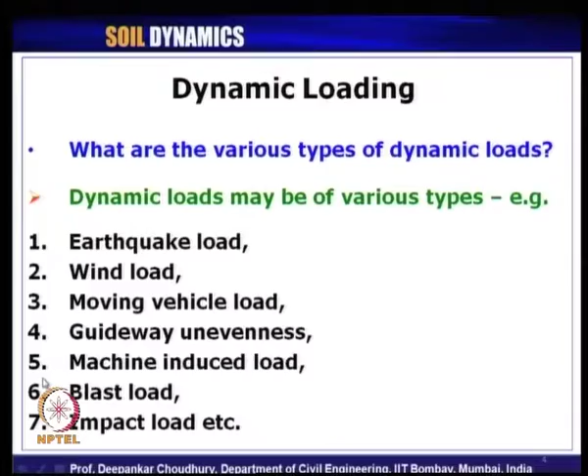In the first lecture, we covered module 1, which contains the introduction of the course. We have seen the need for studying this course and also its objective. Then we have seen what is called dynamic loading: any load which is varying with respect to time, and the dynamic load must vary with time. We have seen examples of various types of dynamic loads like earthquake load, wind load, moving vehicle load, guideway unevenness, machine induced load, blast load, impact load, etc.

But that does not mean that all time dependent loads are dynamic. There can be live load also which are not dynamic in nature. So, to comply with the loads which are dynamic in nature and also varying with respect to time, the criterion is it has to vibrate the system, and vibration is the process of continuous exchange of potential energy to kinetic energy and vice versa.

And we have seen the example of the simple pendulum where the exchange of potential energy to kinetic energy occurs, and another component of energy is also involved in the process: the dissipation due to the loss of energy in the form of sound or heat, etc. So, with that we completed our previous lecture on module 1, the introduction of the topic on soil dynamics.

Let us continue our discussion with today's lecture, lecture 2 of soil dynamics, which contains module 2 on vibration theory. To go into the details of module 2, let us define some of the parameters which will be very much required for us to understand the concept of vibration in this module. The first important parameter which we want to define now is called degrees of freedom, generally denoted by the abbreviation DOF.

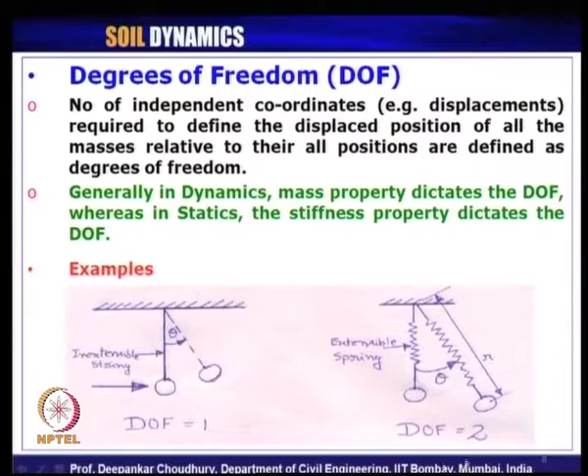Now, if we change the same problem to this problem, that is two simple pendulums connected by an extensible spring or a linear spring, what will happen? Suppose these rods are still inextensible. In that case, how many coordinates do we minimum require to define the position of the system? Suppose we apply a dynamic load to the system here, we need this angle to define the position of this pendulum bob at any point of time. Also, we need to know this theta, because this theta 1 and this theta 2 will not necessarily be the same, because in between there is an extensible spring, because of which the spring will either expand or compress. So, that means theta 1 and theta 2 will be different, or these are the two independent coordinates we require to define the system at any point of time, and that is why the degrees of freedom for this problem is 2.

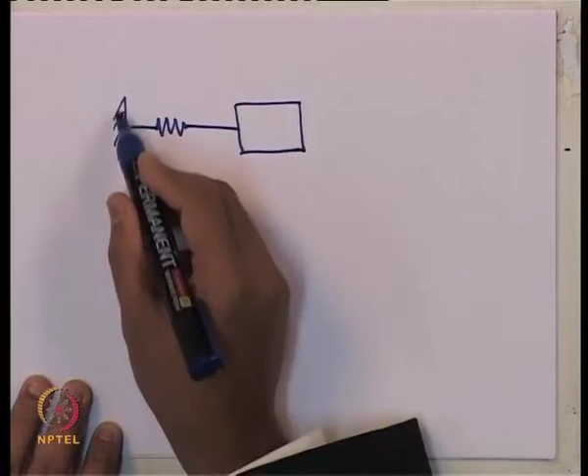Let us look at a few more examples of how to obtain the degrees of freedom of different systems. If we take a system like this, it is a rigid support, then one spring connected to a mass like this. If any dynamic load is applied to the system, how many independent coordinates are required to define its position at any point of time? That is this u of t, because of application of say p of t. So, in this case the degrees of freedom will be 1, because only one parameter or coordinate is required to know its position at any point of time.

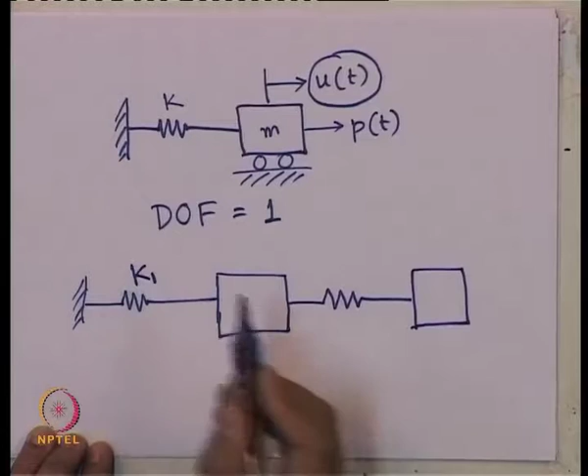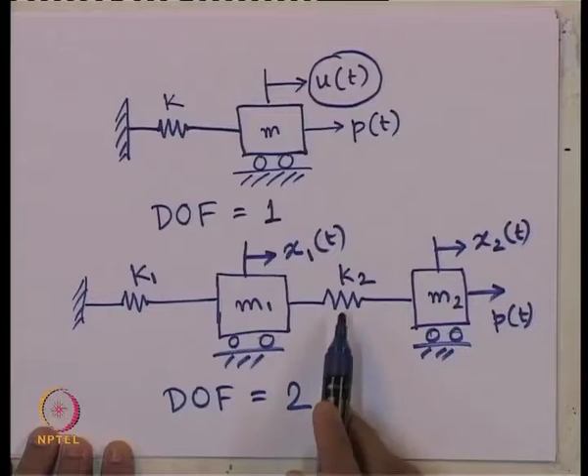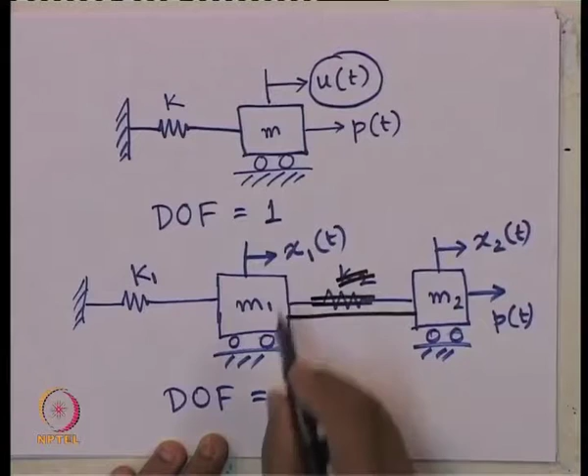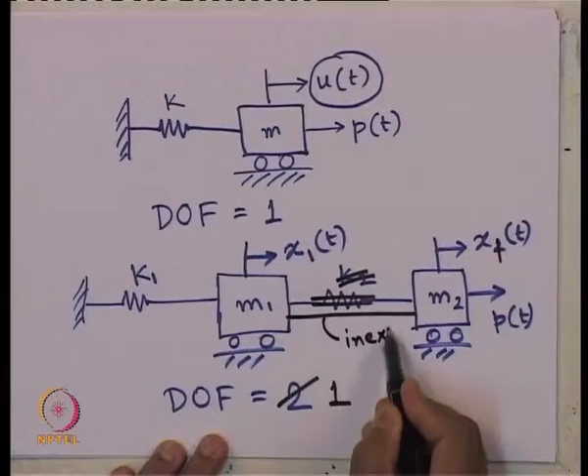Now, if we take another example, suppose we have one spring, then a mass, then another spring, then another mass. Say this is K1, this is M1, this is another spring K2, this is mass M2, and to this system we apply some dynamic load. How many degrees of freedom does this problem have? That is DOF is 2. Where did we get this value 2 from? Because at any point of time this displacement say x1 of t and this displacement say x2 of t, these two are independent parameters or independent coordinates which we require to define, because they are connected through this spring. So, x1 and x2 will not be the same. But suppose we connect them through an inextensible string instead of K2, then the DOF will become 1, because in that case essentially x1 and x2 will become the same if this rod is inextensible. Then the problem boils down to degrees of freedom 1.

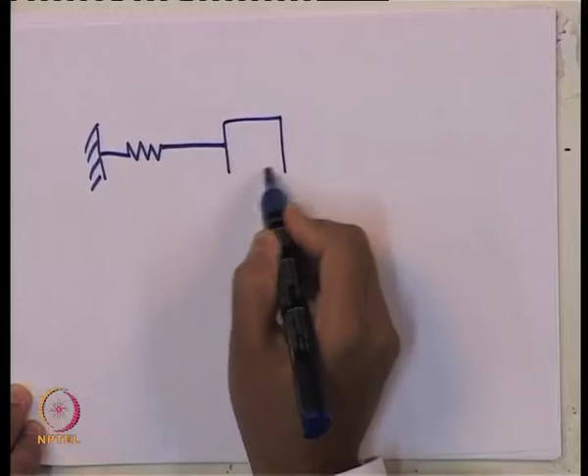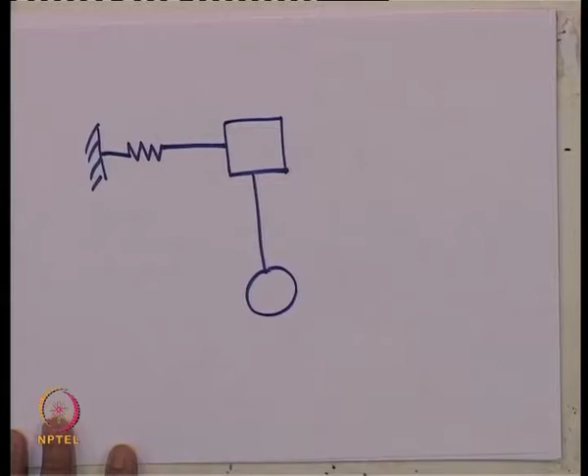Let us take another example. If we have a system with a combination of this linear spring connected to a mass, then connected to a bob or pendulum kind of arrangement, how many degrees of freedom does this problem have? This is mass say M1, this is mass say M2, this is spring K, and this rod let us say inextensible.

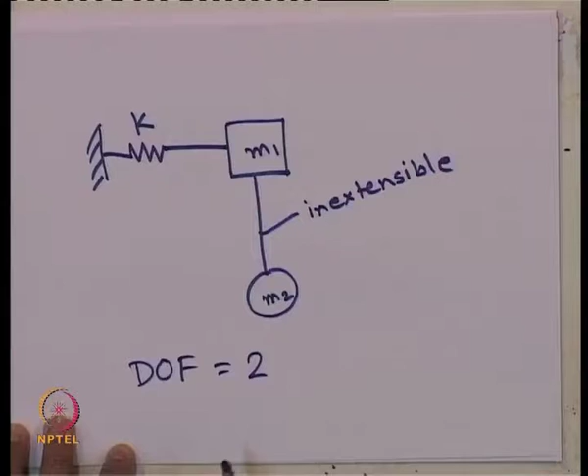In this case, the degrees of freedom for the problem is 2. Why? Because if we apply a dynamic load to the system, the minimum number of coordinates we require to define its position at any point of time is this x1(t) and this theta(t). So, these two are the 2 degrees of freedom for the problem under any dynamic loading.

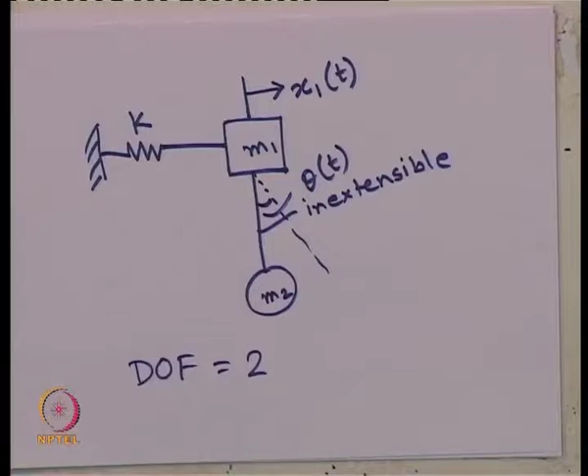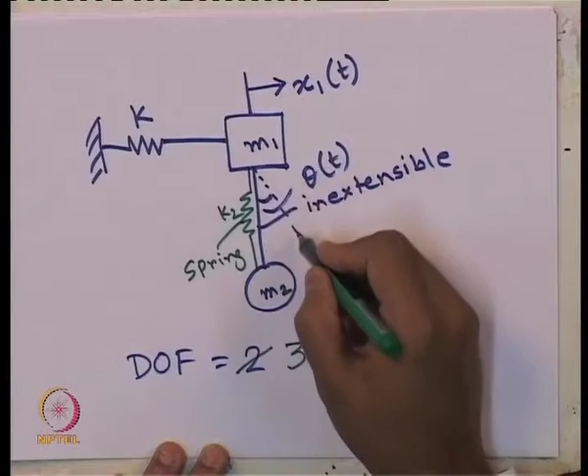Now, the same problem, if we change it a little bit, suppose instead of this inextensible string, it is connected by a spring, another spring say K2, how many degrees of freedom are we dealing with in that case? It will become 3. One degree of freedom is this one, another is this theta, and the other one will be this length, say r(t). So, these 3 will be the degrees of freedom for the new problem we have shown in the green color.

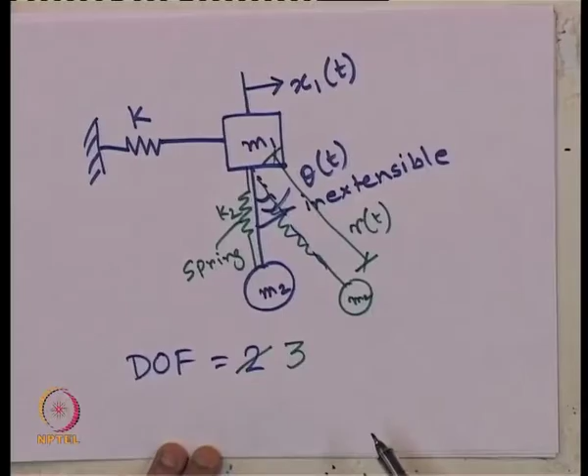So, that way we have to find out how many independent coordinates are involved in any system when we are handling dynamic loading acting on the system, to define its position at any point of time. That defines the degrees of freedom, and it is extremely important to find the correct degrees of freedom for any problem before we start modeling any system in practice, because from then onwards the solution technique and all other things will depend on it. That is why obtaining the correct degrees of freedom is very important for any dynamic problem.

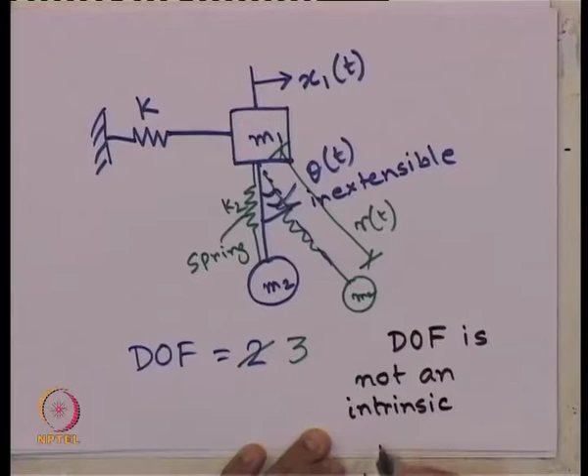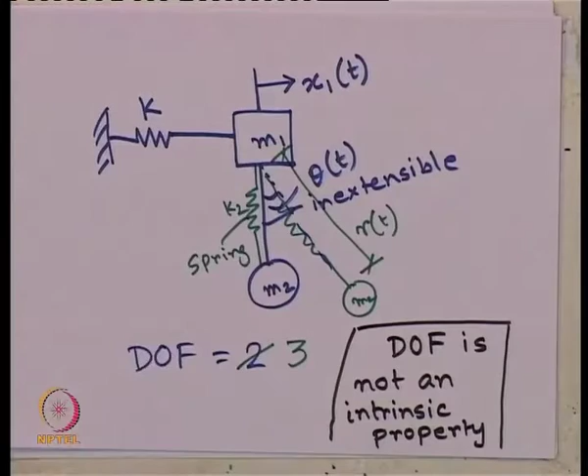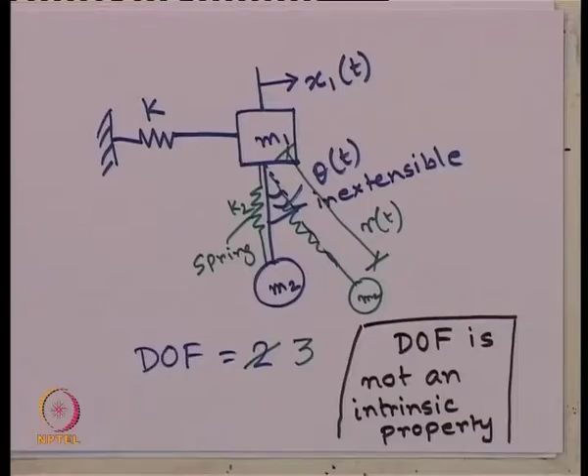But from all these examples, what we can mention, let me write it down. DOF, degrees of freedom, is not an intrinsic property of the system. Why? Because we have seen that for the same system, depending on the conditions of different connections or boundaries, the degrees of freedom of the problem keep changing. So, degrees of freedom is not at all an intrinsic property of the system, but it depends on the boundary conditions and other loading conditions, etc.

Now, let us look at what we studied in the previous lecture. Let us move back. The basic components of vibration. In the previous lecture, we saw there are three basic components of vibration. One is potential energy, in which displacement and stiffness are related to each other. Then kinetic energy, in which acceleration and inertia are related to each other, and then dissipation or loss of energy, where damping is involved.

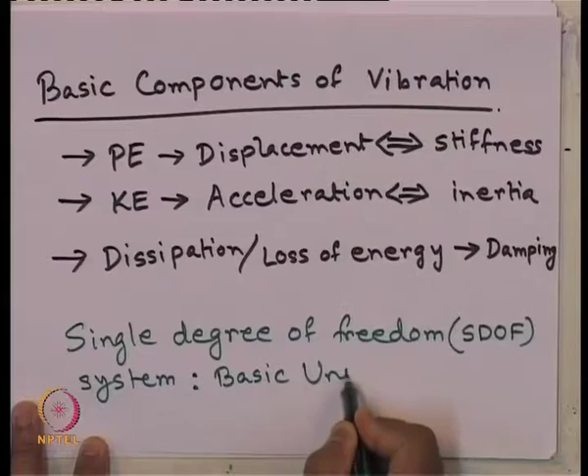So, if we take any simple vibrating system, what is the basic unit for a simple vibrating system? A single degree of freedom system, in short generally written as SDOF. Under the condition of a simple vibrating system, what are the basic units? We have three basic units which allow us to consider all the basic components of vibration, that is potential energy, kinetic energy and dissipation or loss of energy.

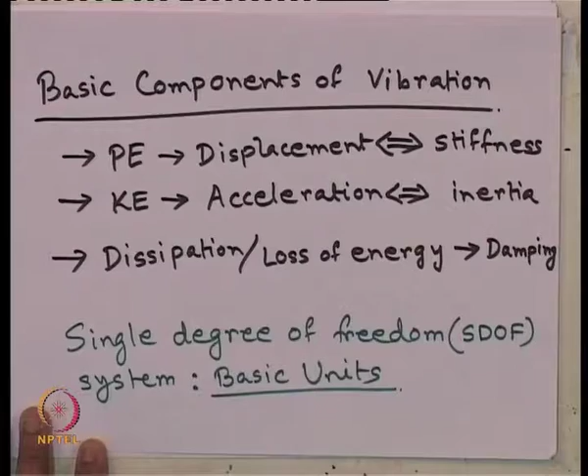Potential energy can be represented by a spring. The kinetic energy can be represented by a mass, and the dissipation or loss of energy can be represented by a damper. So, the basic units of a single degree of freedom system are mass, spring and damper, which in short is called the MSD model. It is clear why in a simple vibrating system we need these three essential components, because these three define all the basic components of vibration. The dissipation is optional, it may or may not be present, but potential energy and kinetic energy are essential in this simple vibrating system.

So, if we now look at the slide, it says for a simple vibrating system with a single degree of freedom, the mass spring damper system is the basic unit. Let us take a single degree of freedom system with a mass m, a spring with spring constant k and a damper with damping coefficient c, which represent these three basic units of any simple vibration. The single degree of freedom, let us say, is defined as u. So, u(t), we should know to know the position or coordinate of the system at any time under this externally applied dynamic load on the system, let us say P(t). Let us assume this is a frictionless surface and these are rollers.

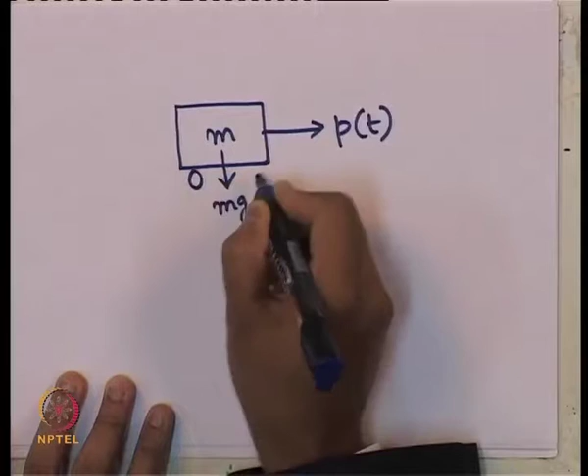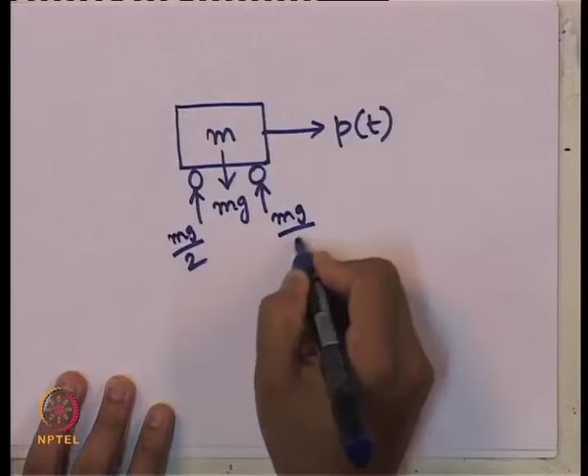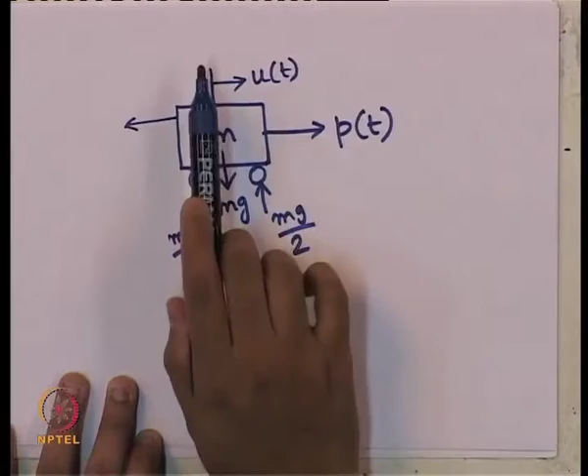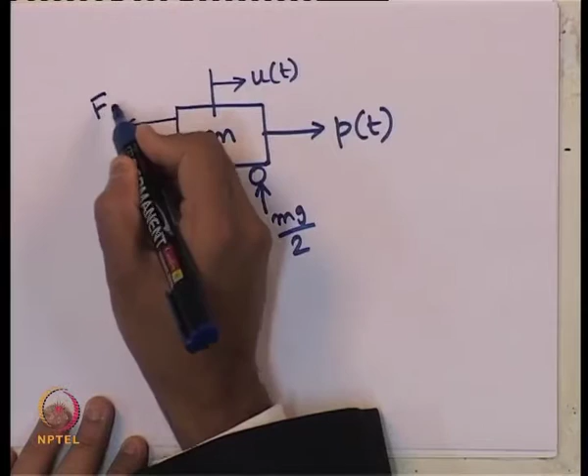Now, what we were discussing just now, let me redraw it here further, the free body diagram. This is the mass on which the externally applied dynamic load P of t was acting, and we have the weight acting vertically downwards, which is getting balanced by the static reactions from these rollers. So, this will be mg by 2, this will be mg by 2, and as at any instant of time it is prompted to move, we have taken its direction of motion in this way. So, obviously, the forces of resistance will try to pull it back to its original position. That is why the damper force, spring force and the inertia force, these three forces of resistance, are getting developed in the system.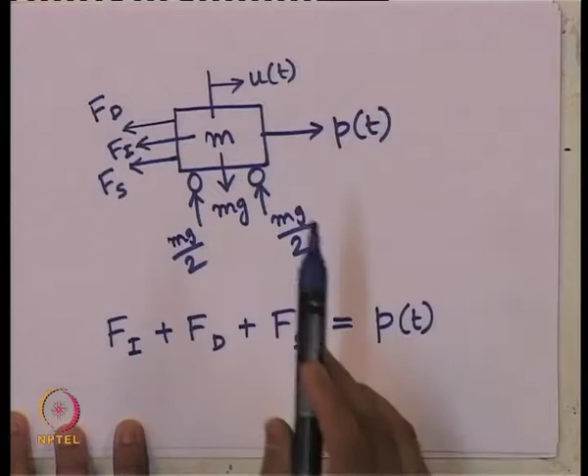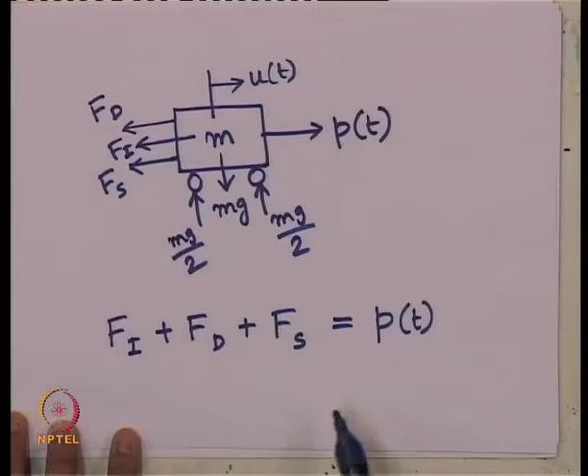using D'Alembert's principle, because it says the externally applied dynamic load for any body which is in motion should balance the inertia force and other forces of resistance, that is damper force, spring force, etc. So, in this case we have these three forces of resistance that must balance the externally applied force to maintain the equilibrium of the system. So, that is the condition we are getting from D'Alembert's principle.

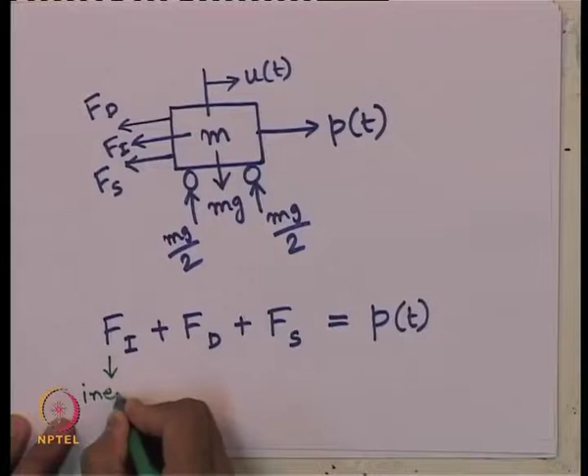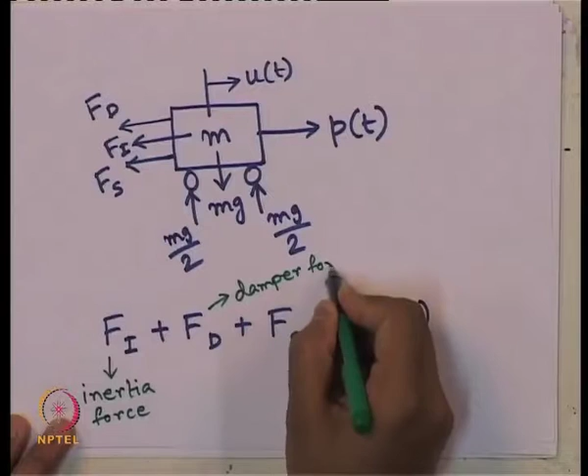Now, let us look at the behavior of each of these three forces. So, what are these three forces? Let us write it once again. This F I is called the inertia force, F D is called the damper force, and F S is called the spring force, and P of t is the externally applied dynamic load.

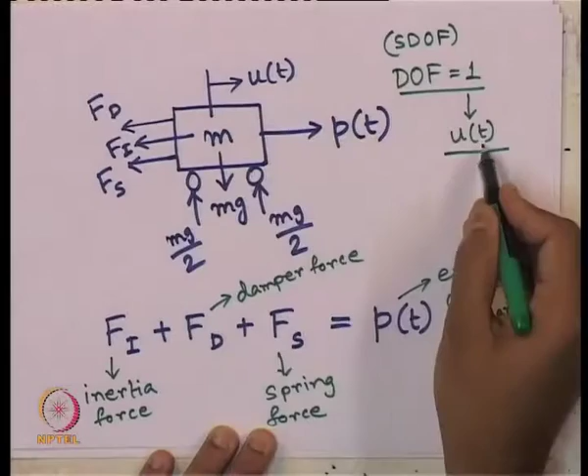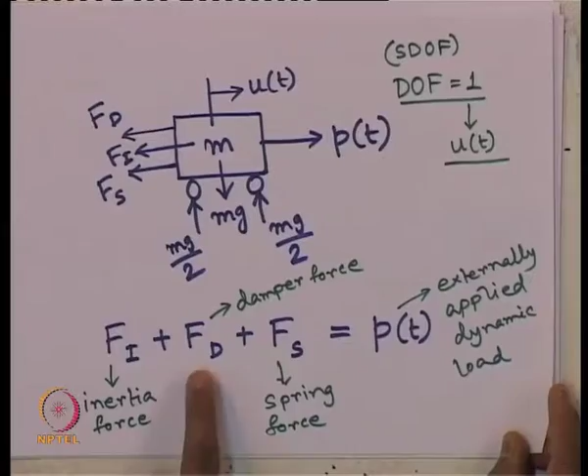In this case it is a problem of degrees of freedom 1. So, that is why we have already defined the single degree of freedom system, and that degree of freedom is nothing but u of t, that is, we should know the displacement at any point of time, which is the minimum coordinate required to define its position at any time. Now, let us look at the nature of each of these forces. So, first let us take the nature of the inertia force.

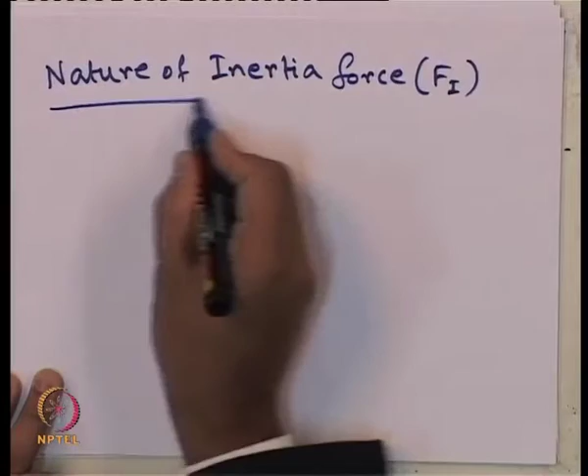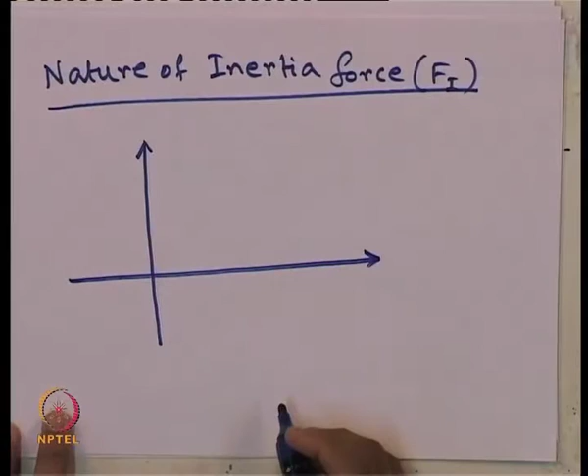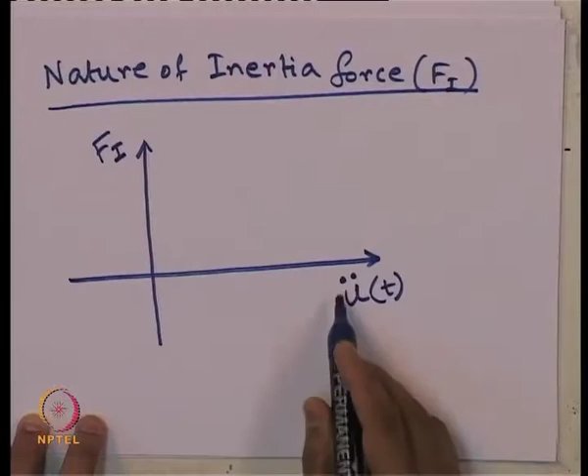F of I. So, how does the inertia force vary with respect to acceleration? Already in the previous lecture we mentioned that inertia is related to the acceleration component. So, F of I, how does it vary with respect to u double dot of t? As I have already mentioned, u double dot is nothing but d 2 u by d t square, the second differential of the displacement with respect to time.

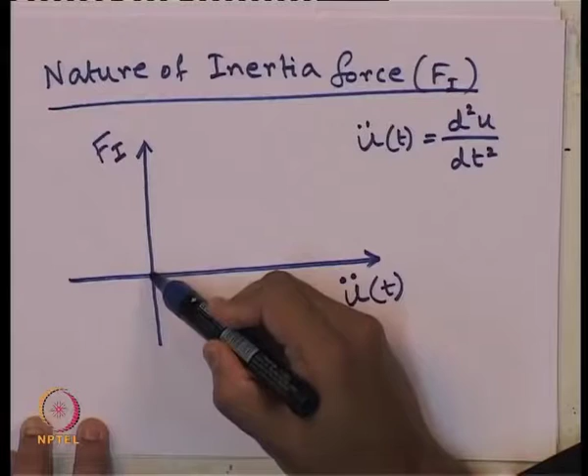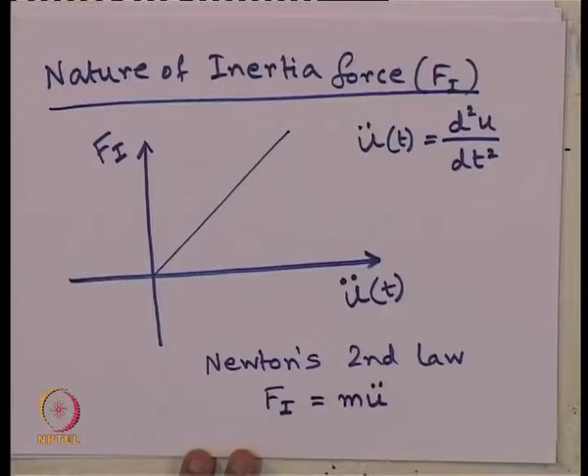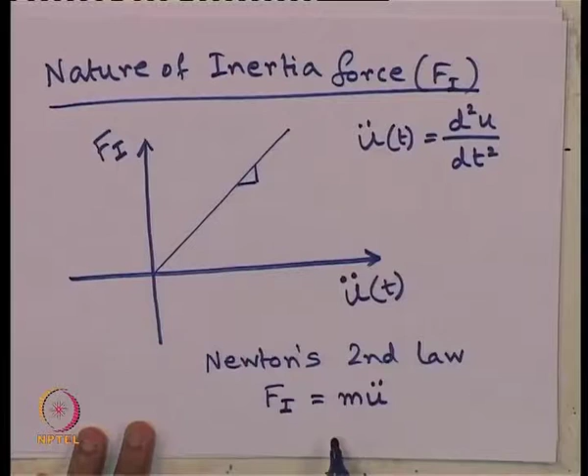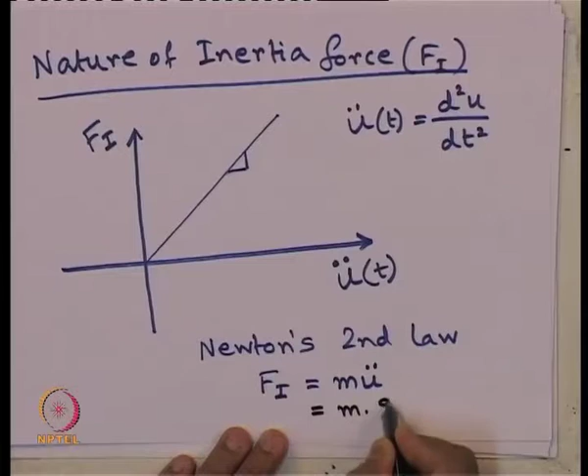Now, we can assume a variation like this, which comes from Newton's second law of motion. What it says is that F of I is equal to m u double dot, that is, inertia force is nothing but mass times the acceleration. In this case the slope of this graph is nothing but the mass. If we rewrite it in a different way, it is coming from m d of dt, then d of u by d of t. So, if mass remains constant, then only this is constant and this behavior is linear. So, this equation is correct for

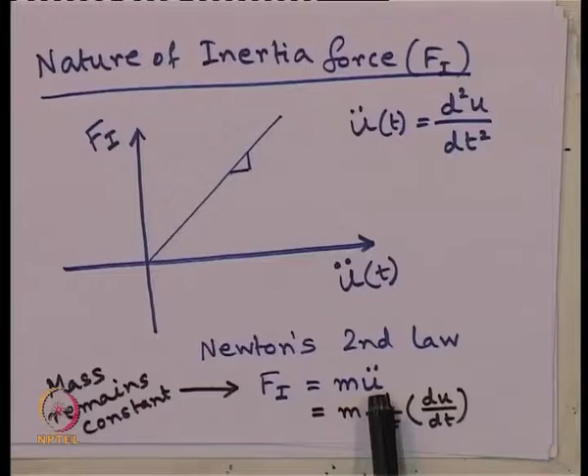mass remaining constant; if m remains constant, then only we can use this relation. Suppose in any dynamic system the mass does not remain constant, in that case it is not this relation of F I with respect to the acceleration, but something different. It can be some curvilinear, some nonlinear variation of F of I with respect to u double dot. In that case it need not be the simple relation.

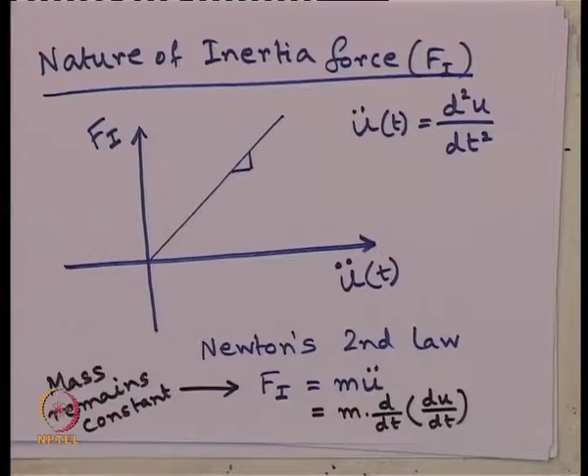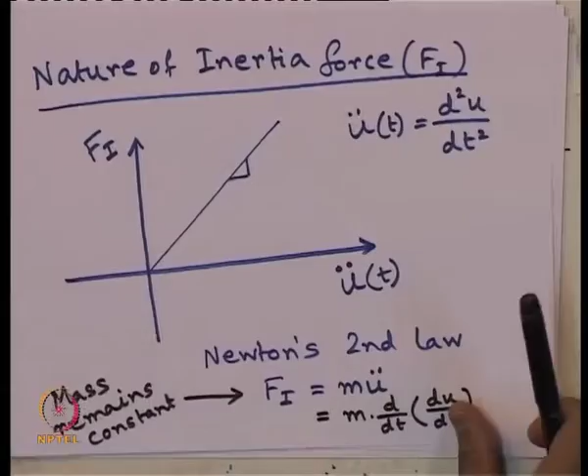For example, when we take some aerodynamic problem, where with respect to time there is loss of mass. So, mass does not remain constant in many aerodynamic problems. In those cases, we cannot use this relation of F I equals m u double dot. It is valid only for a system where there is no change in the mass. So, mass remains constant, then only this equation holds good. So, this is the linear model we have considered for inertia force.

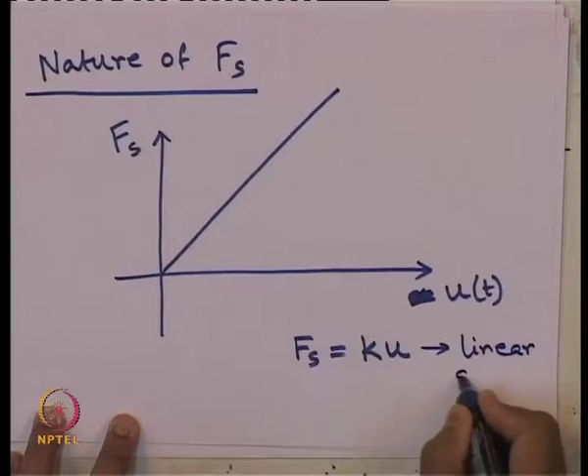the stiffness force. This is valid only for a linear spring, that is, where the force displacement relation is linear like this, then only the slope of this graph is nothing but the spring constant. We know this, but there are several examples where it need not be like this. It can behave something like this, it may behave something like this. These are called, this is like a strain softening effect, mostly considered for cable. This is the hardening effect, mostly considered for beams, rigid beam. So, there the force displacement relation need not necessarily be linear, but it can be curvilinear in nature. In that case, this relation of F s equals k times u does not hold good. So, we have to be careful when we are using these expressions for forces. The spring force equals k of u is valid only for the linear spring.

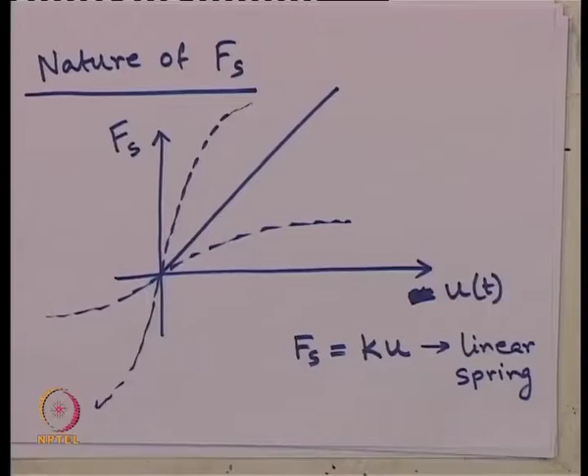Now, coming to the nature of the damper force, F of d. The damper force is related to the velocity component u dot of t, where u dot t is nothing but du of dt. So, how does it vary? It can vary like this, that is linear starting from this 0 point. In that case, we write F of d equals c times u dot t, which is valid for a linear damper once again. If this linear relationship of the damper force with respect to the velocity holds, then the slope of this line is nothing but the damping constant or damping coefficient.

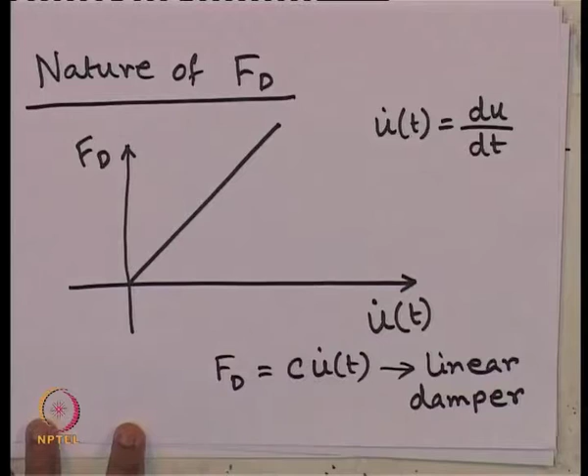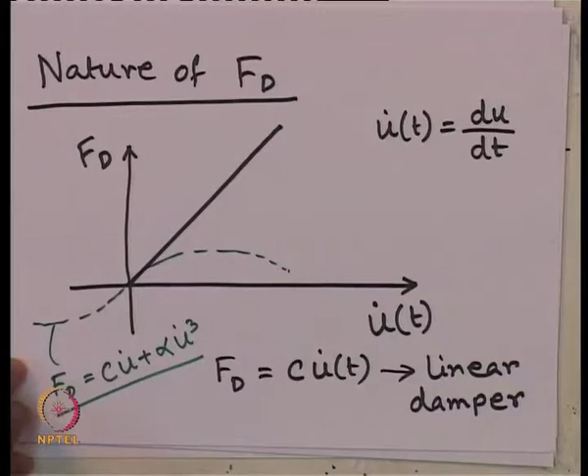But there may be several other variations of F of d with respect to u dot, say some nonlinear variation something like this, which is pretty common in some designs, for example, a chimney subjected to wind load. In that case, F of d can have some nonlinear relationship, say c u dot plus alpha times u dot cube, something like this. Then we cannot use this linear damper equation so easily for our model. So, we have to be careful what type of variation of each of these forces, F s, F d and F i, is considered for a particular model or a particular system when we are analyzing a dynamic problem.

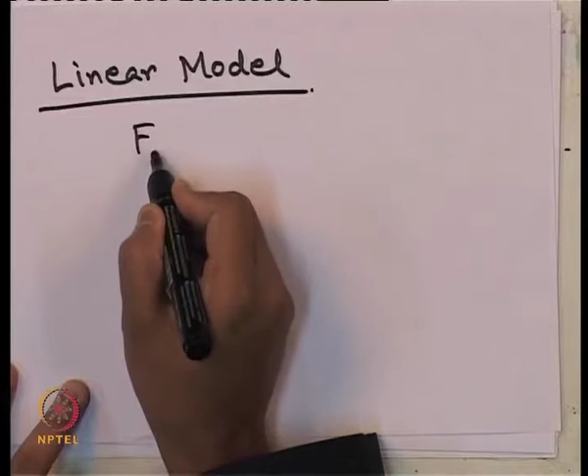So, for the simplest case, what we can mention, by considering the linear model, we got the equation f_I + f_D + f_S = p(t). That was the equation from D'Alembert's principle. Now, if we use the linear model, f_I is nothing but m times d²u/dt², that is the inertia force. What is the damper force? c times du/dt. What is the spring force? k times u, that equals p(t).

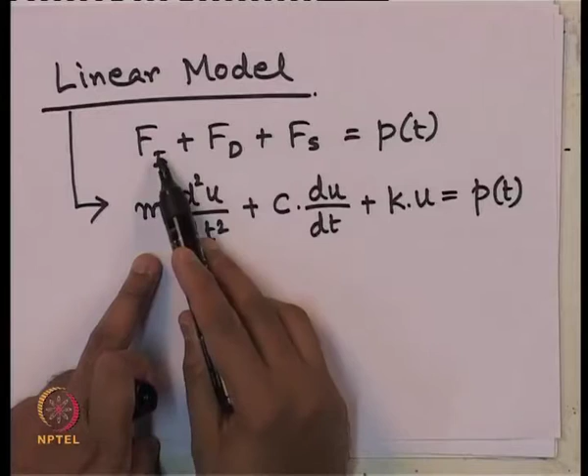So, this equation we have written based on the nature of all these inertia force, damper force and spring force, by considering them to follow the linear model, that is a linear system where mass is not changing, then this equation is valid. The linear damper, then this relation is valid. A linear spring, then this equation is valid, which in other form we write as the governing equation of motion m u double dot plus c u dot plus k u equals p(t).

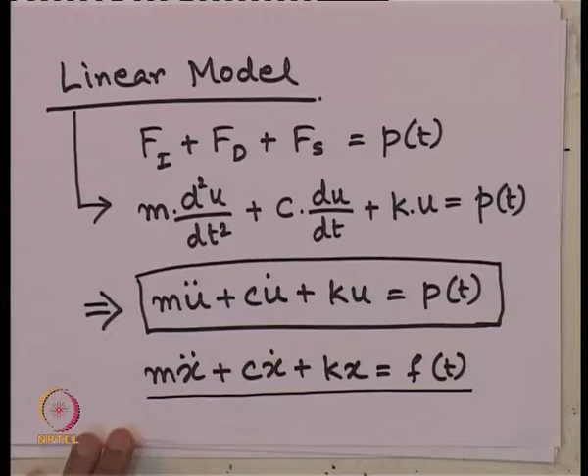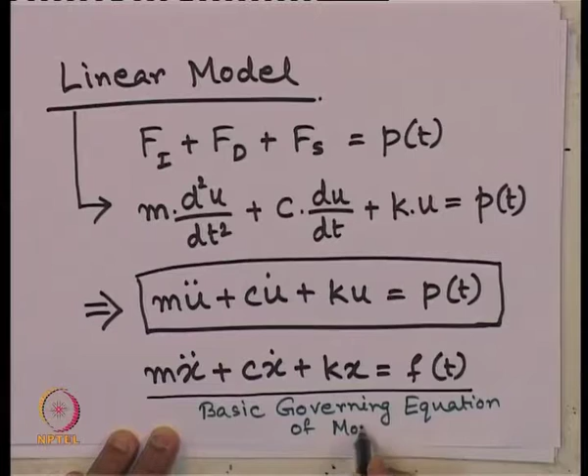The same thing in some books can be written as m x double dot plus c x dot plus k x equals f(t). The same thing is written using different notations. That is, instead of u for the displacement, x is considered as displacement. In that case, the same relationship can be written in this format. So, this is called the basic governing equation of motion. So, the basic governing equation of motion for a single degree of freedom mass spring dashpot model vibrating system is expressed as m u double dot plus c u dot plus k u equals p(t).

If we take the unit for mass, stiffness and damper in different systems, that is the MLT system, that is mass length time system, the FLT system, force length time system, and the SI unit, then the unit of mass in the MLT system is of course the mass M itself. For stiffness, the unit is mass by time square, that is M T^-2. For the damper, the unit is mass by time, that is M T^-1. In the FLT system, the unit for mass is force by acceleration, so F L^-1 T^2. For spring constant, the unit in the FLT system is force by length, and for the damper, the unit in the FLT system is force by velocity, so F L^-1 T.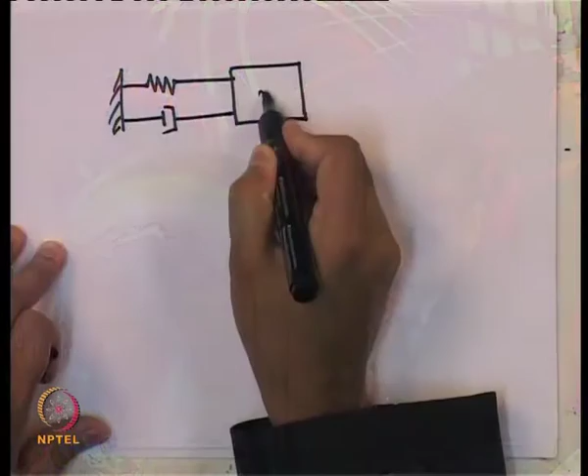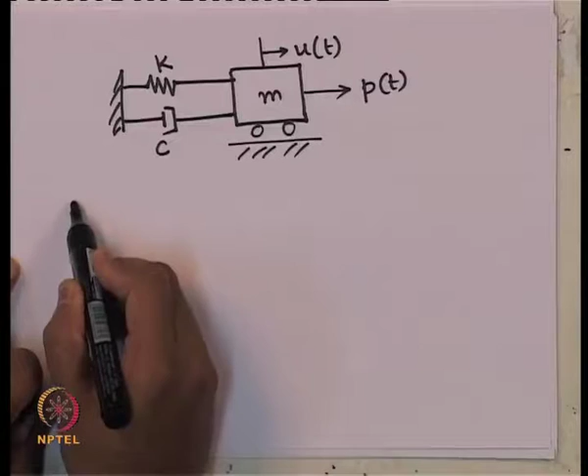Now, let us see what are the different types of vibration we can have by considering this linear model. For different types of vibration in a single degree of freedom system, let me draw that single degree of freedom system once again. Mass, spring, dashpot, we have an externally applied dynamic load, and this is our degree of freedom. So, for this single degree of freedom system, the major classification is, one is called free vibration. What is free vibration? If there is no externally applied load on the system. So, if this p(t) is not present, then the system is called free vibration. But if that externally applied dynamic load is present in the system, in that case we call it forced vibration. So, in that case p(t) is not equal to 0.

Now, within each of them we can have again two separate subcategories. Within free vibration we can have two categories. One is undamped. Undamped means when this damper is not present. So, there is no damping effect, c equals 0, and another is damped, that is c is present, not equal to 0. Similarly, for forced vibration also we can have the same two conditions, that is undamped and damped.

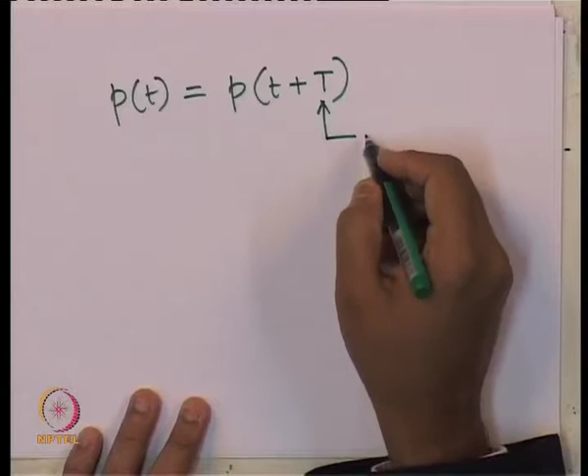What is periodic forced vibration? Periodic forced vibration is when we have a system where this P of t is such that it repeats its nature after a certain period. In the previous lecture, we discussed that this capital T is generally denoted as the natural period. So, if we mention it as the period, then this is the type of force on the system when the dynamic load is present. For example, it can be a sine load or cosine load, where the nature of P of t repeats after a certain period or certain time. In that case, it is called periodic

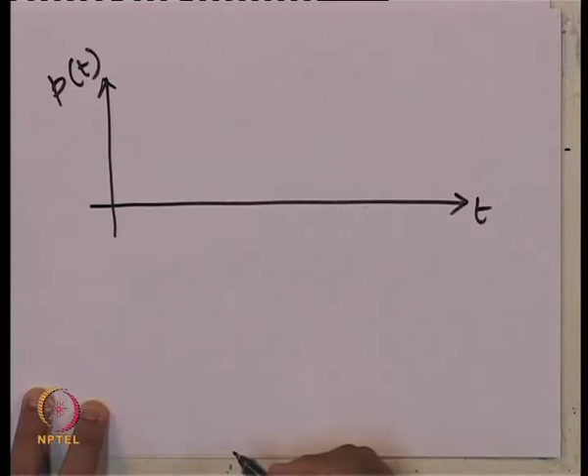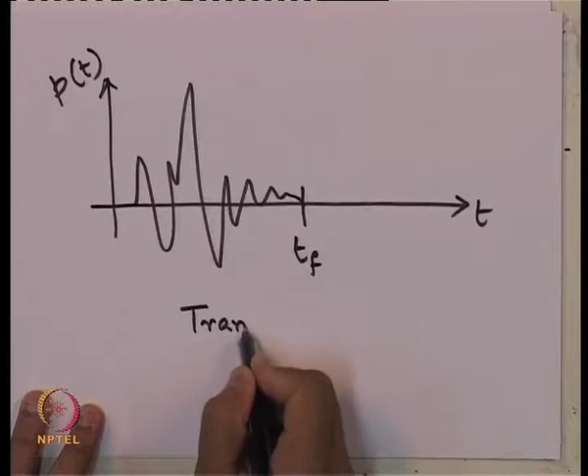What is transient type aperiodic forced vibration? When this externally applied dynamic load, that is P of t with variation with respect to t, is aperiodic in nature. Suppose it starts somewhere here and it is random actually, and it stops here at a certain time, say T f. After that, P of t is not present in the system. In that case, we call it transient aperiodic forced vibration. Why transient? This time t should be less than or equal to a finite time. This time should be a finite value, then we call this type of aperiodic forced vibration a transient type aperiodic forced vibration.

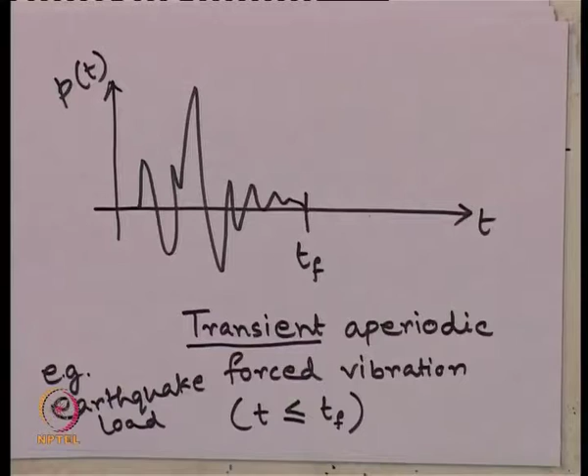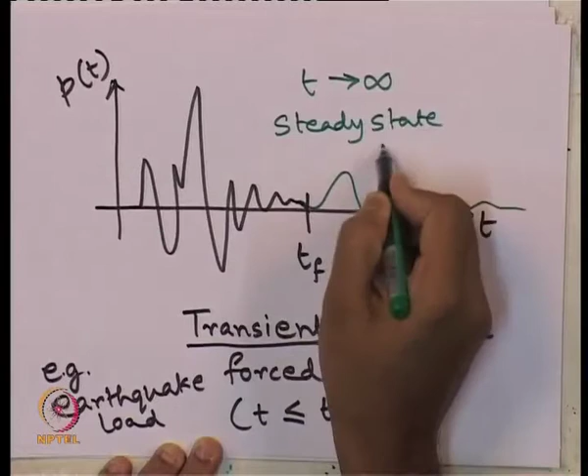What is an example of this transient type aperiodic forced vibration? For example, earthquake load. That is a good example of transient type aperiodic forced vibration, because an earthquake occurs for a finite duration of time. Whereas, suppose this externally applied dynamic load keeps continuing for time t tending to infinity, in that case we call it steady state aperiodic forced vibration.

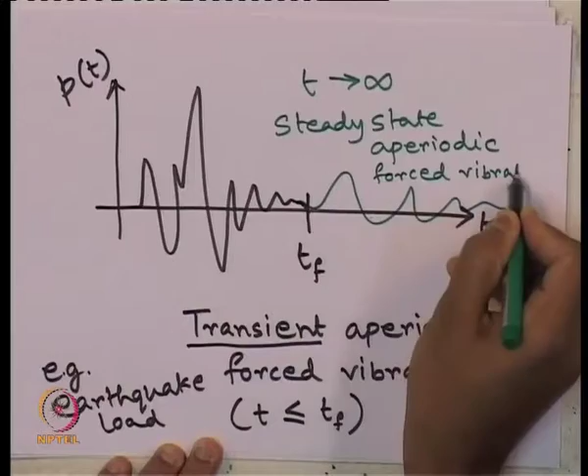So, an example of steady state aperiodic forced vibration can be wind load, because generally we consider wind load to keep acting on the system, that is, the dynamic load, where the load varies with respect to time for an infinite time. So, that is why in the slide, aperiodic forced vibration has been subclassified as transient when the time for which the dynamic load is acting is a finite amount of time, whereas it is called steady state aperiodic forced vibration when that applied time duration tends to infinity. Now, let us take one by one each of these different types of vibration, their basic solution from the governing equation of motion for a single degree of freedom system, and how to get the response of the system, that is, the displacement profile at any point of time.

Before starting that, let me take up another subtopic, that is free vertical vibration of a single degree of freedom system. Just now what we have studied is a single degree of freedom system subjected to an externally applied dynamic load in the horizontal direction, where we have taken the degree of freedom in the horizontal direction.

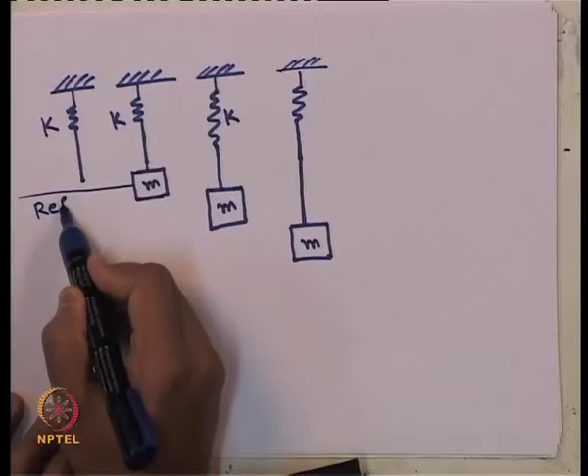Now, about this point, let us say we apply some vibration to the system. So, now it vibrates with respect to this axis, and the new position is somewhere here. If we take this initial position as a reference line, this is the position after having a static displacement, delta static, due to the own weight of the mass. From this line to this line, let us define this as z of t. So, this component is nothing but the dynamic displacement.

So, this is the single degree of freedom we are considering, because at any point of time this z of t, in one instant it will come down, in another instant it will go up. So, about this line it is vibrating.

Now, if we write the equation of motion for this system, before that what should we do? We should draw the free body diagram of the system. What we can see? There will be a spring force F s, an inertia force F I, mg, that is the weight of the body, and suppose there is some dynamic load applied to it, say P of t. So, what will be the equation? By using D'Alembert's principle in this direction, we can write F I plus F s equals mg plus P of t.

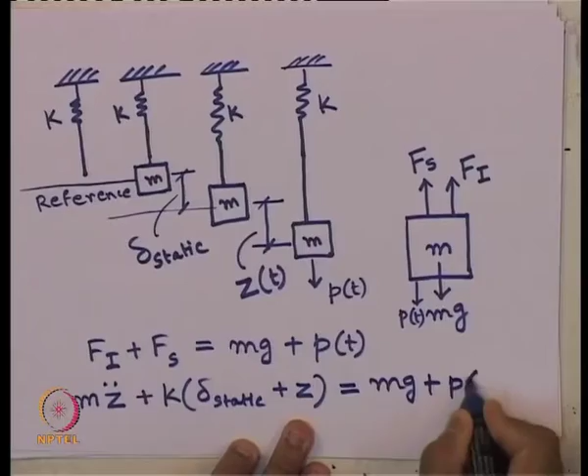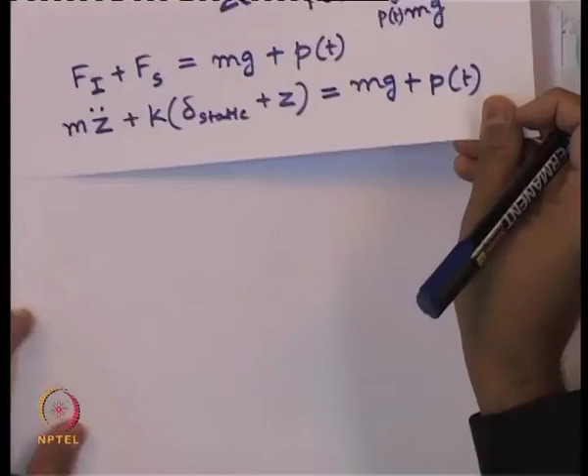Here note, we have not considered the damper. If we take the damper, the damper force would also have been added here. So, what we can continue from here: m z double dot plus k delta static plus k z equals mg plus P of t. Now, in this case note that mg, the weight of the mass, is nothing but k times delta static, because on adding the mass, due to its own weight it comes down, and this is the static displacement. So, these components are equal and we can cancel them. Therefore, the governing equation of motion we get is m z double dot plus k z equals P of t.

So, what we can see is that the dynamic governing equation of motion remains exactly the same as in the horizontal vibration case. And in this case, we have to remember that z denotes only the dynamic component of the displacement. If somebody wants to compute the total displacement, they must add the static component of displacement also to this dynamic component. Otherwise, the dynamic equation of motion remains the same in any case of vibration, whether it is horizontal vibration, vertical vibration, etc.